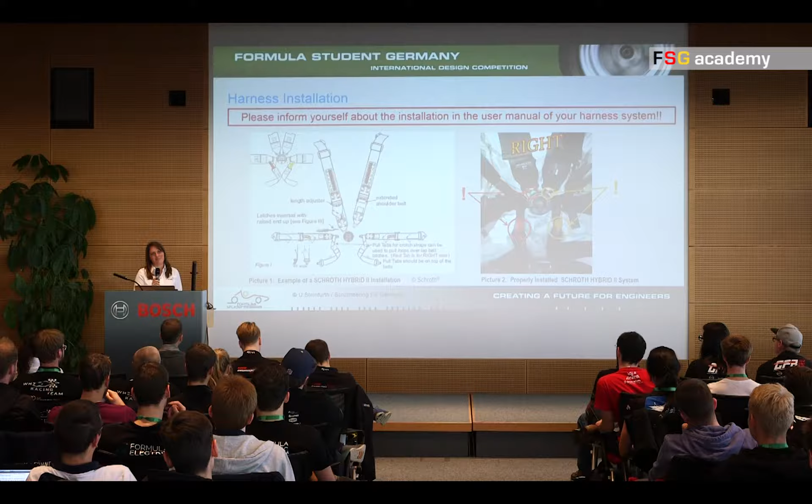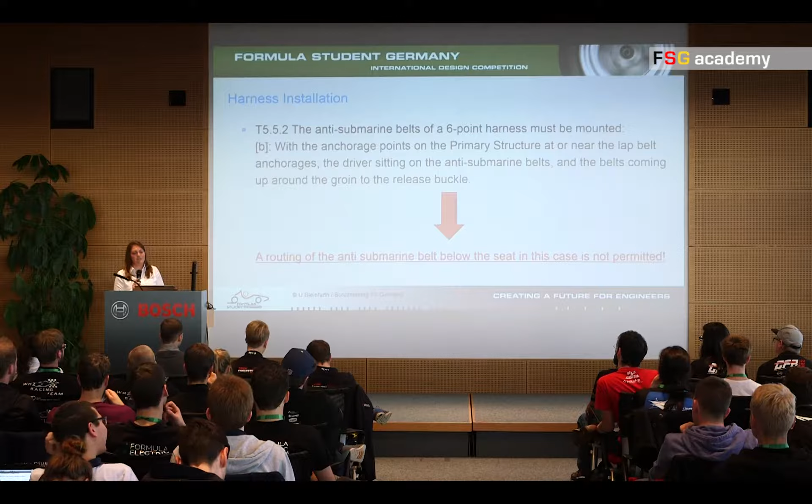One thing that always goes wrong is the driver harness. You see pictures of how you should adjust them. Please look at them and then do it the right way. And also, for the drivers, don't open your driver harness when you're driving the car. We have to take you out and you have to get in again. We saw it this year in Hockenheim. And we have a lot of rules. Please read them carefully, what is allowed, what is not permitted. It's quite clearly stated in there.

Another thing is the bodywork. You see a lot of nice cars, they're looking great, and then we have to change some stuff on the nose. They have to make some adjustments because the nose doesn't have the right radius. You can measure it before and make sure it's right. And here you even have a template.

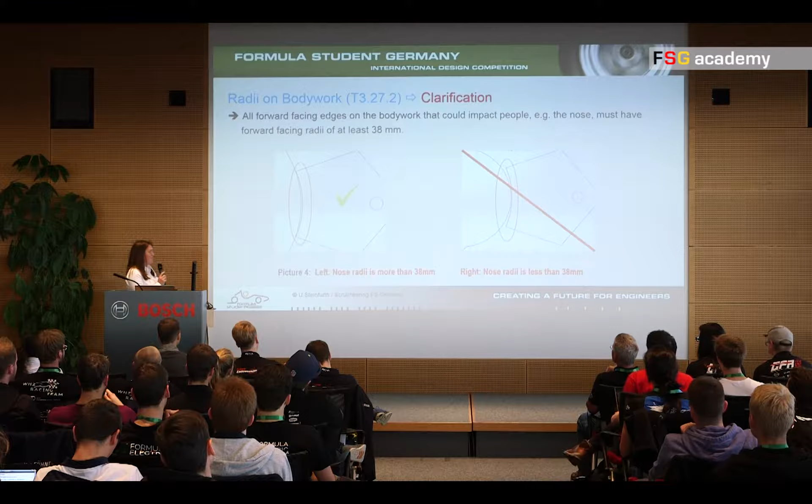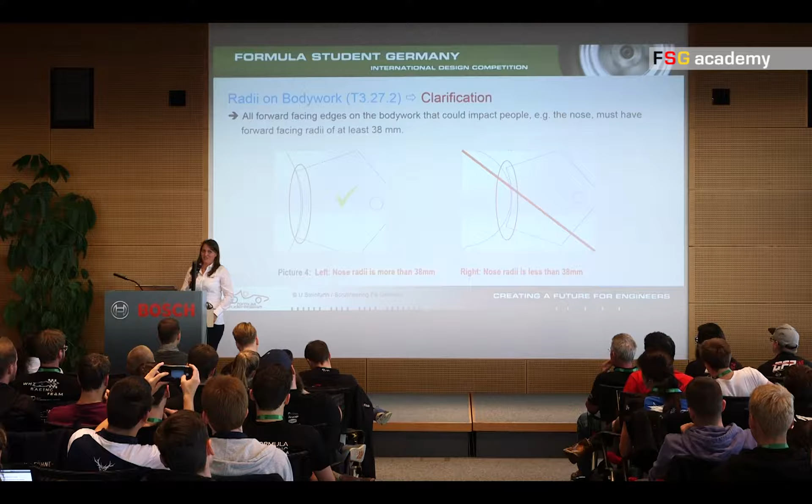So if the template fits in there, as you see on this side, it's okay. If you can move the template on top of the nose, it's not okay, it's not correct. Please test it before scrutineering. You save your team and all other teams a lot of time.

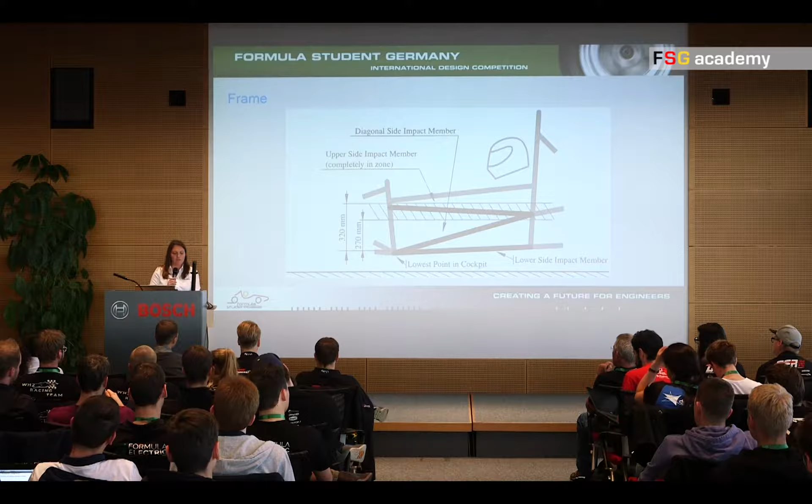So if you have surrounding structure, like main structure around it, between these 2 points, and the driver is sitting in this main structure and side impact structure, it is fine. So if the rule from the FSAE T4.3.1 applies, you are fine to go. Our rules don't say something different. We just explicitly put the second part of the phrase in there, but it means the same.

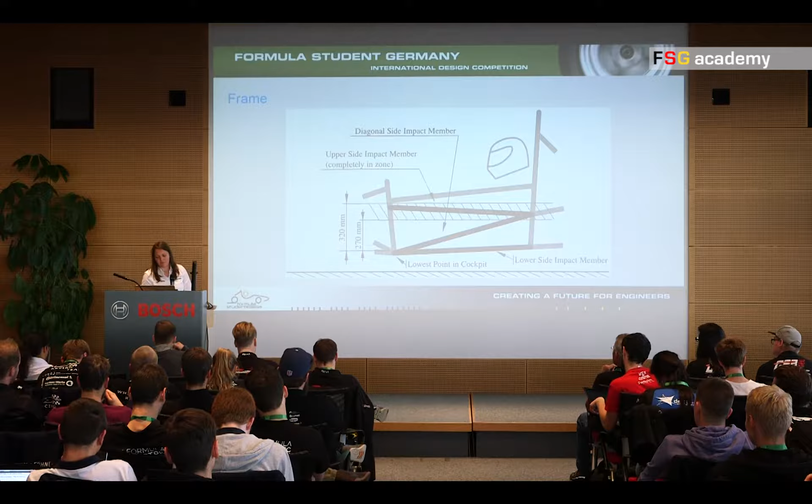Did I forget something? Okay, then we come to the impact attenuator. We had some questions. What is the crushable zone or the impact attenuator zone? It's all the zone in front of the impact attenuator. There should be nothing, and also the zone defined in your test. If you test your IA and it has a slight deformation, this deformation zone towards the driver is also the zone where nothing is allowed to be in.

Another thing is, if you want to test this, you still have to test it in this case with the attachment of the wings, like you did it last year, if it's mounted to the IA, or if you put some forces to the IA or the hoop behind it. Then you have to test it the way it was. If you mount your wing behind it, you don't have to test it.

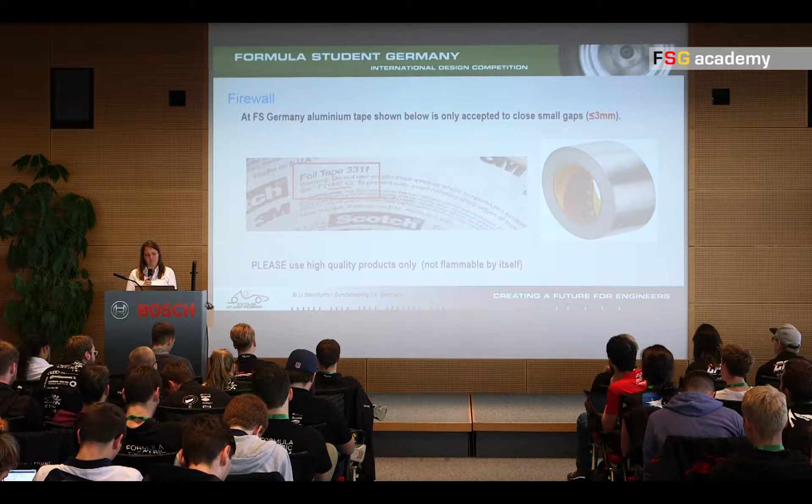Another thing, aluminum tape is not proper fastening for a firewall. You can't put a firewall in and just tape it with aluminum tape. We don't count this as properly fastened for a firewall. You also need fasteners. The tape is just to sometimes fill in some small gaps between your monocoque and your firewall, but it's not for fastening. And here are some other materials you could use. Please check them before you get there.

And you can have self-made fasteners, because it's a design competition. So you can have them, and we will accept them. But please make sure that you bring these things with you: the documents, your calculations, your testing data, and all the data sheets from the manufacturer or wherever you had your fasteners manufactured. Don't try to calculate on the event site. Bring the material with you beforehand.

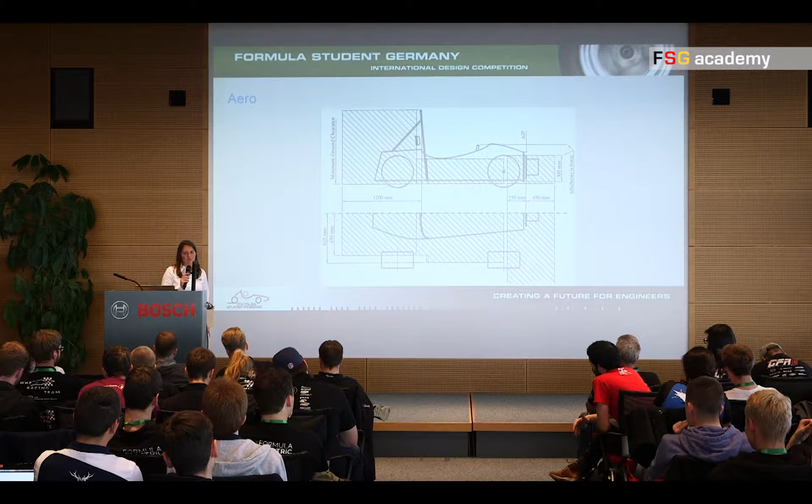We don't want to give you the exact numbers. You should think about what is best for your car and your performance, and we don't want to give you all the information - it's a design competition. The same applies to the accumulator case. Now you have forces again, and you have to calculate your own fasteners. You don't have eight fasteners anymore; you have to calculate how many you need. But I'm sure you can manage this task quite well.

So now I will hand over to Simon for two more electrical rules. But it will be interesting for combustion teams as well, because you're getting electrical rules this year too.

I will start with stuff important for the combustion cars as well, but we will go back quite some months - and you probably noticed the bed over there and some battery components. So if a battery burns, it looks like this. That's why the accumulator container and the battery are so important.

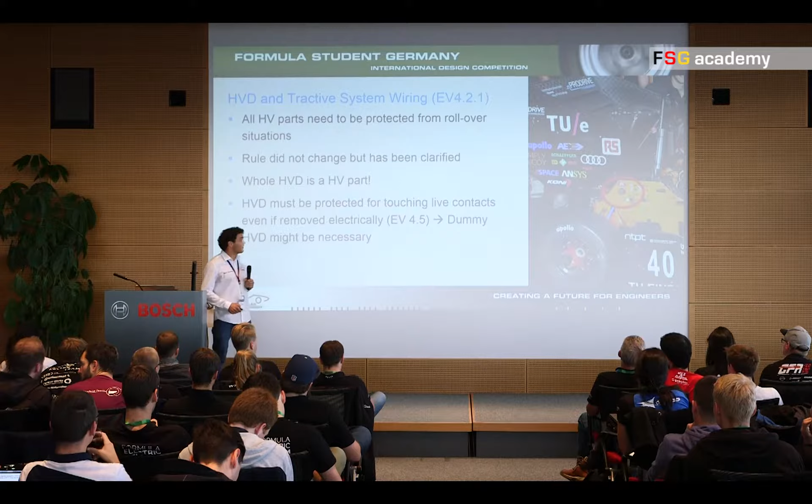Another mistake: probably you can see the contacts, live contacts. The HVD has to be protected from being touched. Probably you should use a dummy connector.

And there's a new rule. You have to make sure that if this wiring breaks, no matter where, for example here, it can never reach the cockpit opening or the driver. We will be really strict for this rule next year. We have been this year as well, but it's an important rule.

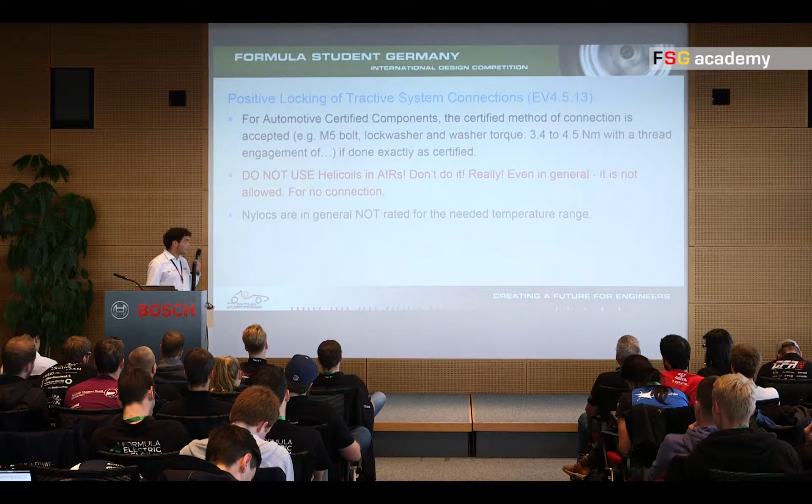So let's come to the positive locking. Probably you will be happy about the new positive locking, because you must not in any case manipulate your AIRs anymore. Don't use helicoils in your AIRs. Just don't do it, don't think about it. Don't use them anywhere in any connection in the HV system.

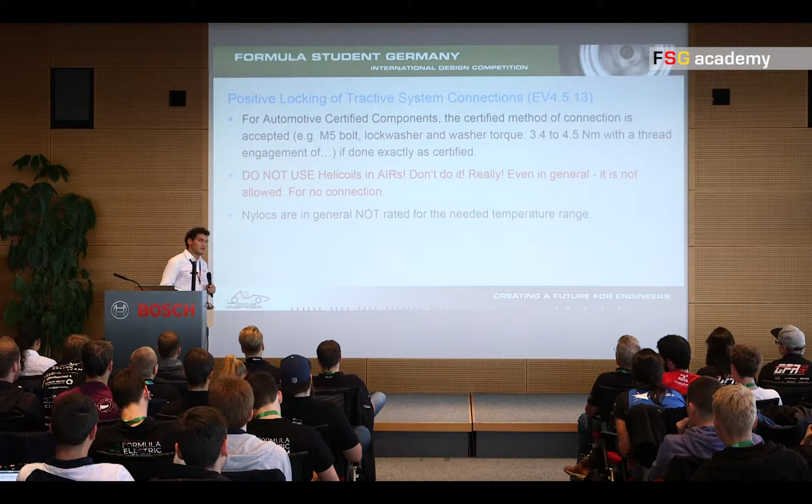And if you have proper AIRs, automotive certified, just use them as they are certified. If they are certified for lock washers with a torque from 3.4 to 4.5 Newton meters, it's fine. Have your data sheet where this is stated, and we will accept that.

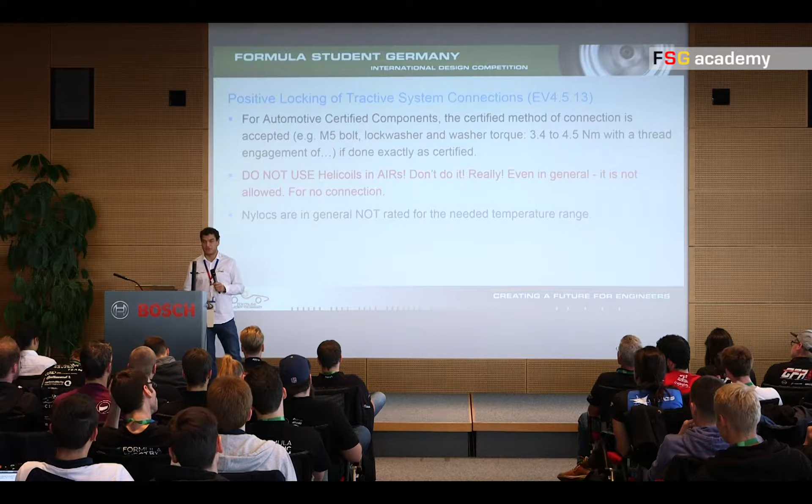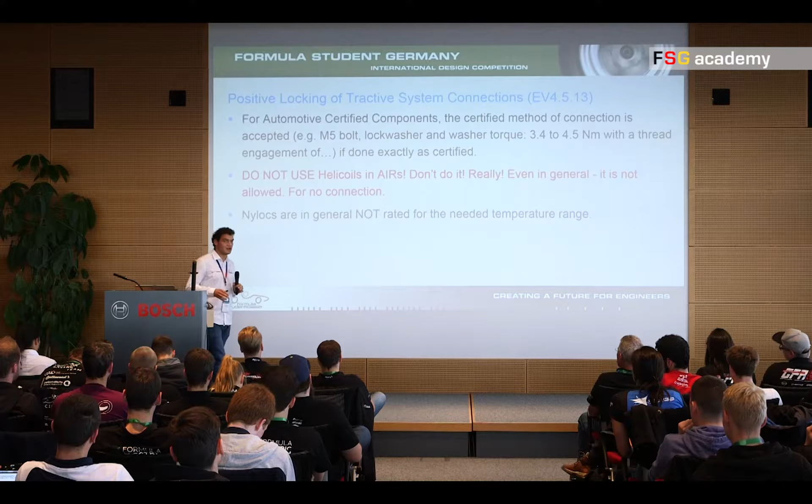Just as a hint, nylocks normally do not fulfill the temperature range needed. Nylocks are often just rated for 80 degrees, but it's needed for the tractive system to have a temperature rating of 90 degrees.

Next thing, we had a lot of discussions last year about plastic and stack ups for connections. So every tractive system connection you do, if you do it by compressing electrically conductive parts, no matter what you are doing, there must not be any plastics in the stack up. Never ever, no plastic, don't do it. We won't accept it. And for connectors, withstanding voltage is not equal to rating voltage.

We know that there are some mistakes in the ESF database, but they won't be accepted next year. Check your connectors. If you buy the wrong connectors, you have to buy a new set, I think.

Maintenance plugs: we have seen quite a lot of good and bad ideas, that's why we have a new rule. It must not be possible to connect them wrong. So if you have maintenance plugs and you can plug them in a different manner, it's a bad idea. You have to change your design, because then you could cause a short circuit, and that's unfortunate for the guy doing it.

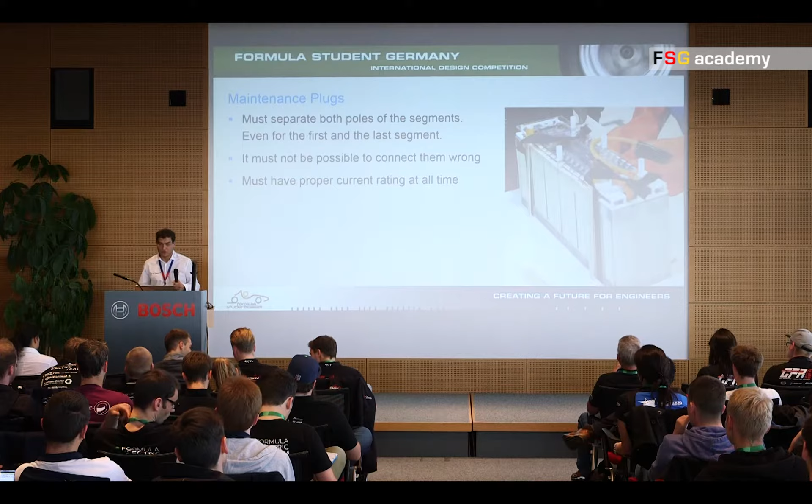And the maintenance plugs have to separate both poles of each segment, even for the first and the last segment. If you do that, you can work without any electric potential on your AIRs or on your surrounding electrics, and your battery segments are completely disconnected from them. So it's no new rule, it's just to clarify this rule.

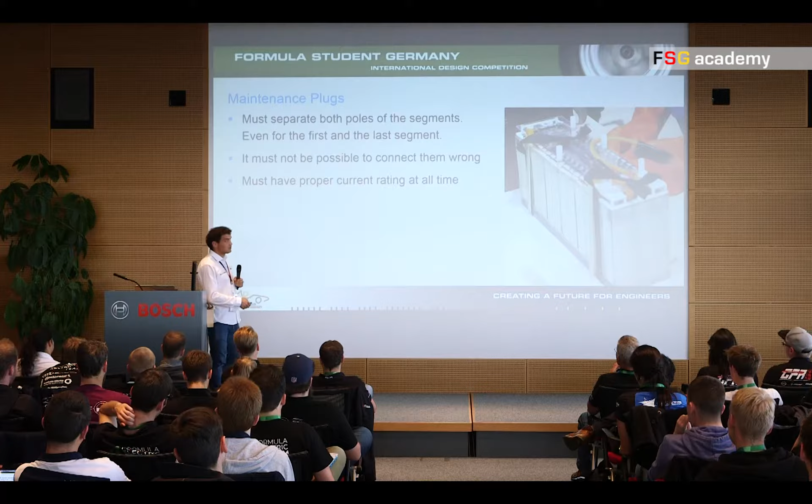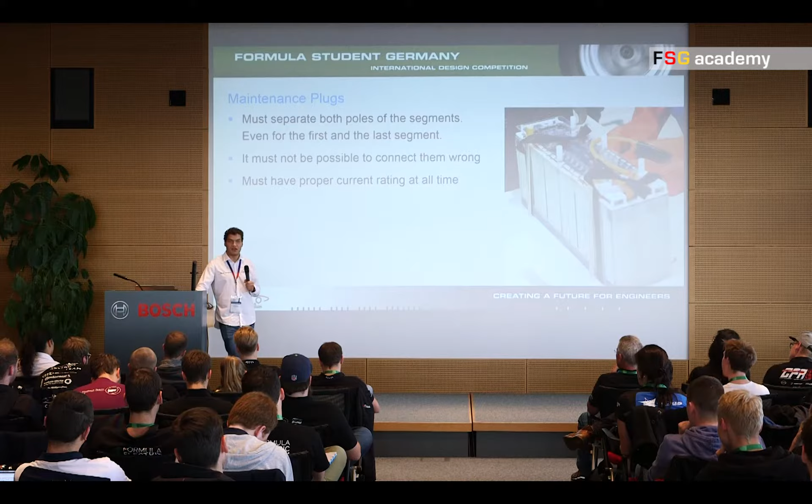Last but not least, another clarification: if you build your custom connectors or use any connectors, they must provide proper current rating at all times. Even at 90 degrees, because that's the temperature rating it must have, and at 1g lateral acceleration, and in rain and moisture. At all times there must be a proper current rating. And if you cannot guarantee proper current rating, use different connectors.

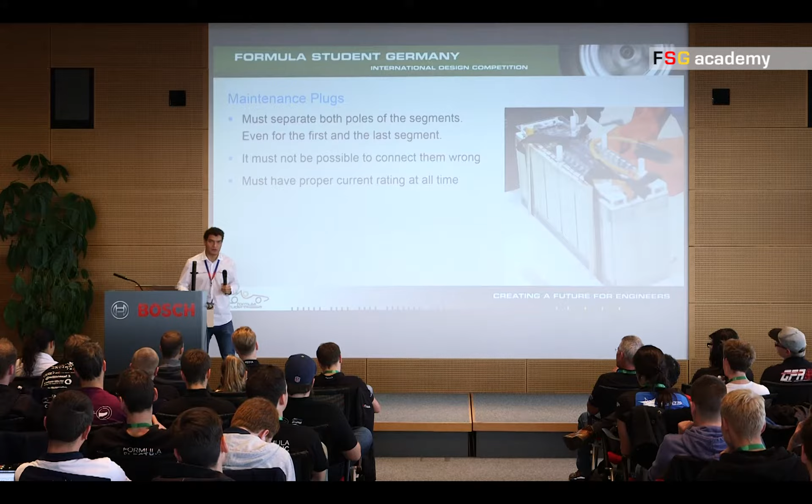And now the tractive system active light, probably the most noticeable change to the old rules.

The reason for this light is to indicate if the car is likely to move, or if there's HV available outside of the accumulator container, or if it's safe. So that's why we introduced the green light.